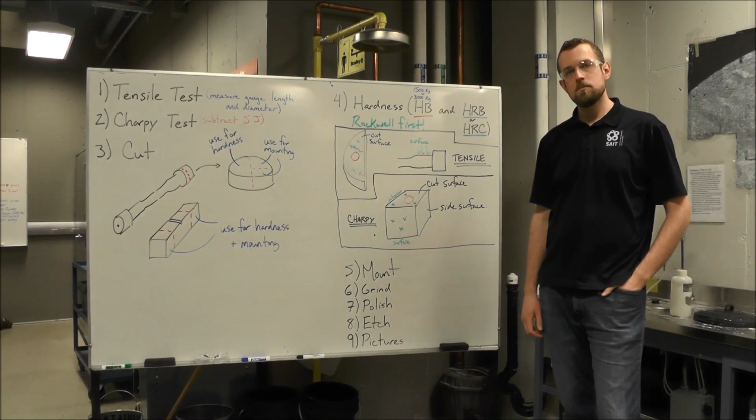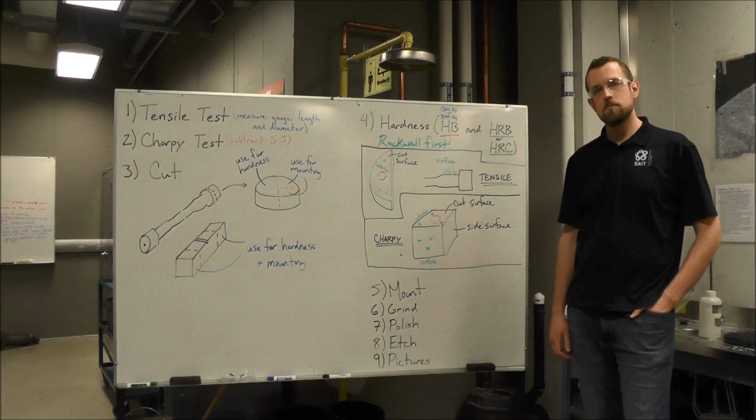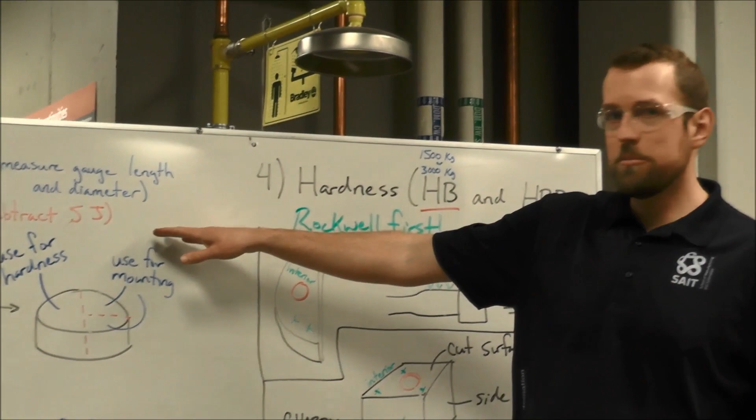Steven, do you want to explain what is left from lab 4? Well, I guess I'll start by saying you guys should have already finished all of your mechanical testing. You did the tensile testing, some Charpy testing, cut all the samples up, and then did our hardness testing, both Rockwell and Brinell. Most of you are done that 100%, that's great.

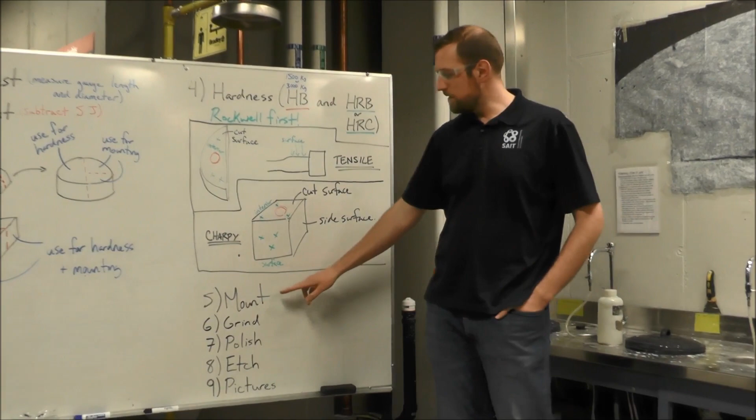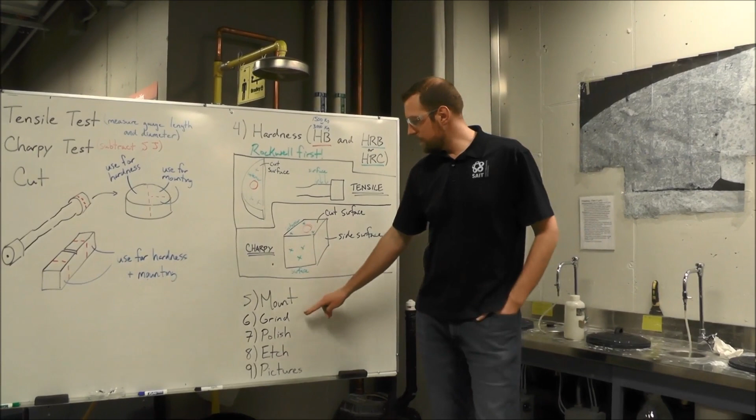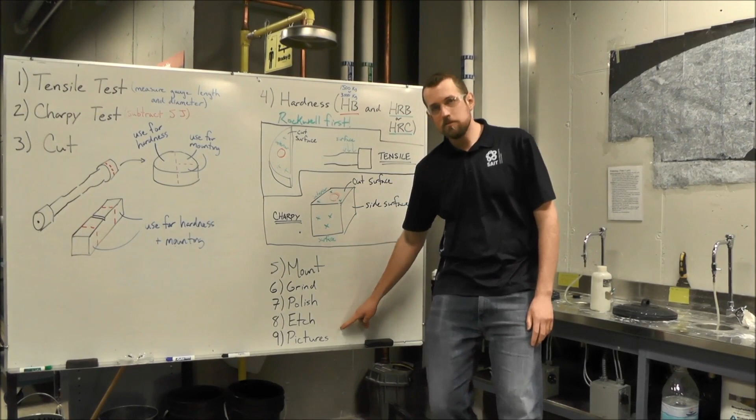What this video is going to cover is the mounting process, actually getting our samples and putting them together to create the hard plastic puck with the metal samples inside. We're going to grind that sample and polish it, which will make a nice mirror finish, and then we're going to etch it with some acid to reveal the microstructure, which will allow us to take pictures on the microscope. So we're going to take this video through all of those steps.

Okay, you mind if you tell them about the cuts on the samples, when you have the images? Yeah. How are the samples? Yeah, let's show the samples.

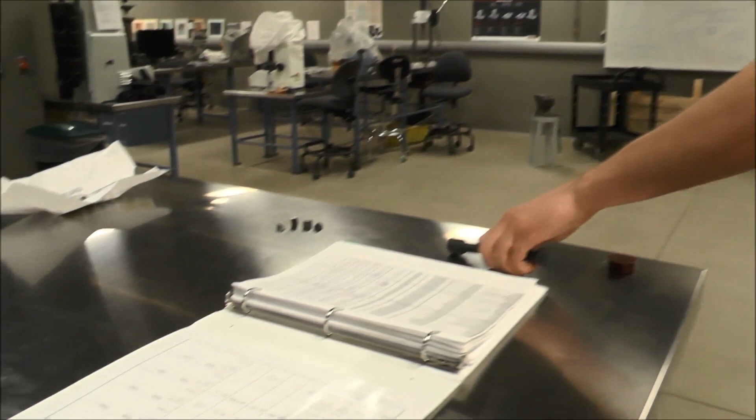So you guys have already done the cuts to create a variety of different samples here, but the main thing with the cuts for the metallography, for actually making the little puck here, we need 2 samples from each of the tensile and the Charpy. That's why we're mounting 4 - 2 from the tensile, 2 from the Charpy.

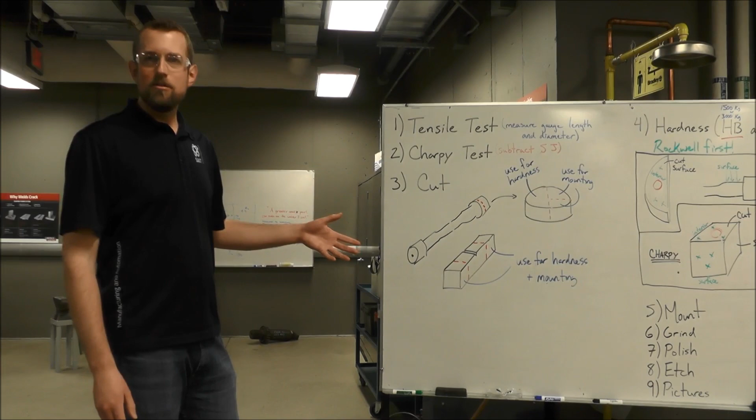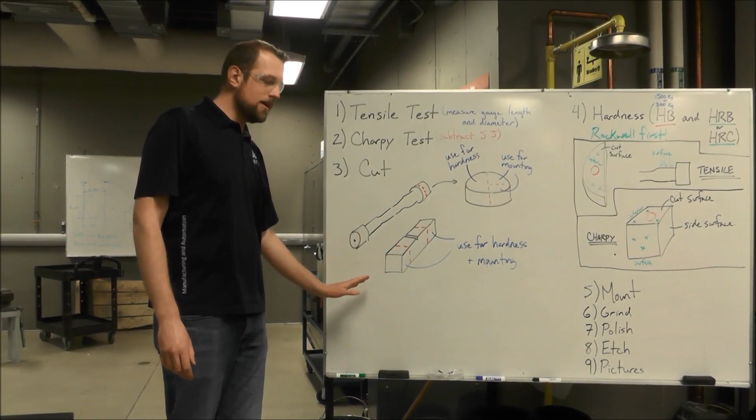The reason we're doing that is because we want to see the grain structure in different directions. None of your samples were cold rolled when you received them, but they were cold rolled when we received them. Then we annealed them or quenched them or normalized them or whatever we did. We shouldn't expect to see any elongated grains in our samples, but they were elongated previously, and there might still be some evidence of that, and we want to take a look and see. In both cases, for the tensile and the Charpy, the rolling direction was along the length of the sample. So if there were elongated grains, they should be along the length of the sample there.

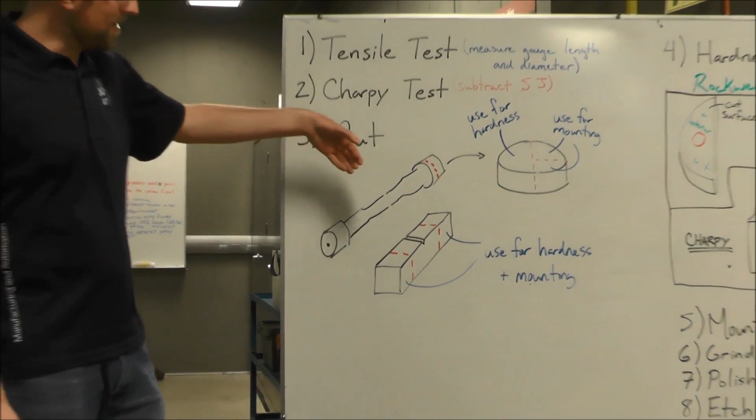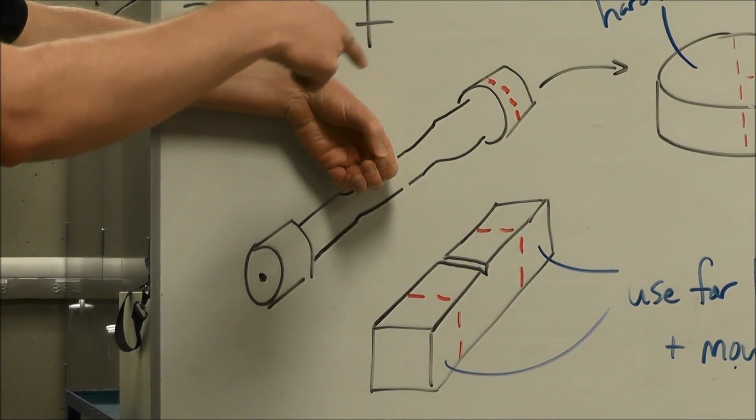I like to think about that as uncooked spaghetti. Right now I'm holding a handful of uncooked spaghetti, and if I were to look at this side, I should see the length of those grains. This is our rolling direction sample. We're going to look at the side to see the length of those grains. If I look at the end of the spaghetti, I'm going to see small spaghetti, right? The ends of the elongated grains. That is our transverse direction sample, the second sample we're putting in there.

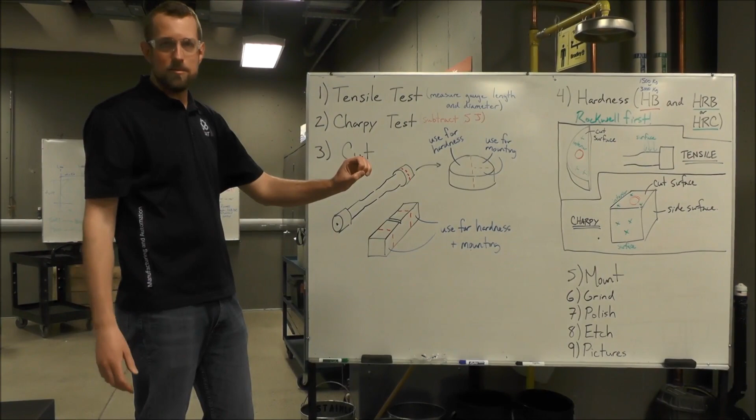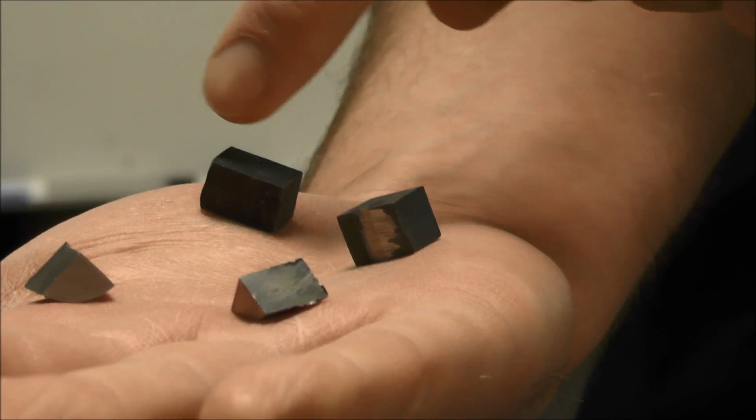And so at the end of the day, we have 4 samples total that we're going to be mounting. 2 from the Charpy, the 2 ends that you guys cut off - you did hardness testing on one of them, but that's fine. We're going to look at one with the side surface that should show the elongated grains along the length of the sample, and one on the cut surface to show the ends of those grains, since the elongated grain should be going in this direction in that case. So transverse direction, rolling direction for the Charpy.

And for the tensile, these pieces would have been standing up like this, let's say. The elongated grains are going this way in that case. We're going to look at this face for the transverse direction, and then one of these faces for the rolling direction. Maybe just rotate it so - oh sure, like that? Yeah, there. So the rolling direction, like elongated grain, should be going this way, and that should reveal those. Rolling direction, transverse direction for the tensile.

Okay, and when it's mounted and the puck is ready, it would look something like this. Let's go do some mounting. Let's go.